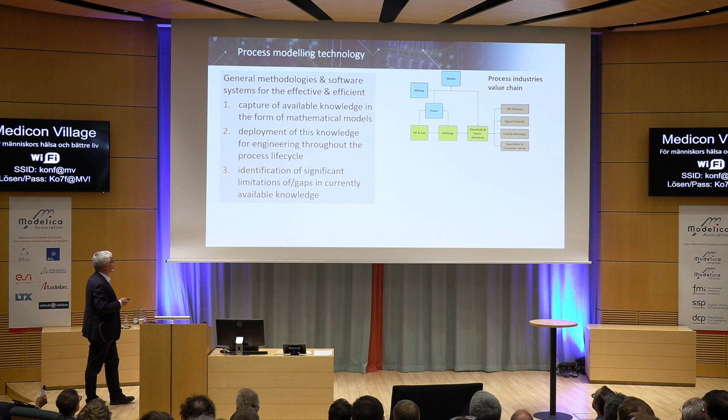So first of all, this talk is not so much about process modeling, it's about process modeling technology. And this is our definition of process modeling technology. It's general methodologies and systems for the efficient and effective, first of all, capturing the available knowledge in the form of mathematical models. So process modeling technology does not create new science, it captures what is there already.

Deploying this knowledge for engineering across the process life cycle, and then identifying what the gaps in the currently available science are. So process modeling doesn't create new science, but it helps guide science with an engineering objective.

We are talking about a different set of industrial sectors, as shown at the top right there, starting with upstream oil and gas, getting the oil and gas out of the ground, refining the oil and the gas, then the main chemical and petrochemical industry, and then we go into all sorts of things, including pharmaceuticals, agrochemicals, food and beverage, specialties, and so on.

Power in various forms is part of these process industries in the sense, for example, of not only power generation, conventional power generation, but the nuclear industry; nuclear fuel reprocessing is one of the main applications of this technology. And then, of course, this links up with mining, metals, and so on.

So a different set of industries to what we've been hearing this morning, mechanical, electrical, aeronautics, but nevertheless, of course, a very challenging environment. For starters, we don't know what a linear system is in process. We never, ever look at linear systems, not even as approximation, because all the processes are non-linear for various very well understood physical reasons. Okay.

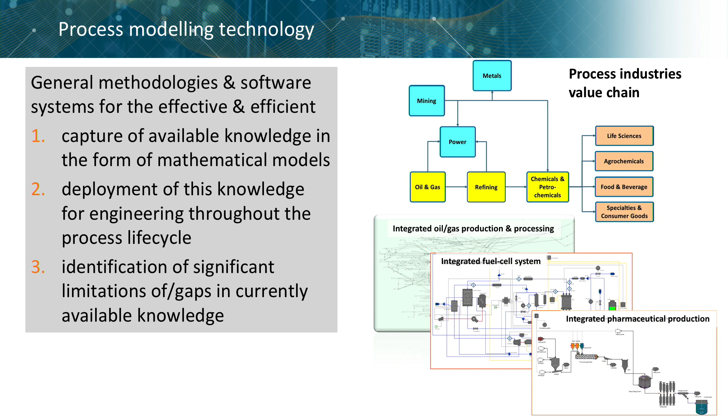Okay, so in terms of an outline for this presentation, it's two parts: where are we now, and where are we going to next? Nobody who's been in this industry for very long would venture to go beyond a decade forward in predictions. So I'm going to focus myself on what's going to happen in the next decade in terms of predictions, and then we have some conclusions.

For those of you who want to switch off at this point, my conclusions are very similar to what you heard from Karl Johan Åström. So, we did not communicate before, yes, and I didn't change my slides during lunch.

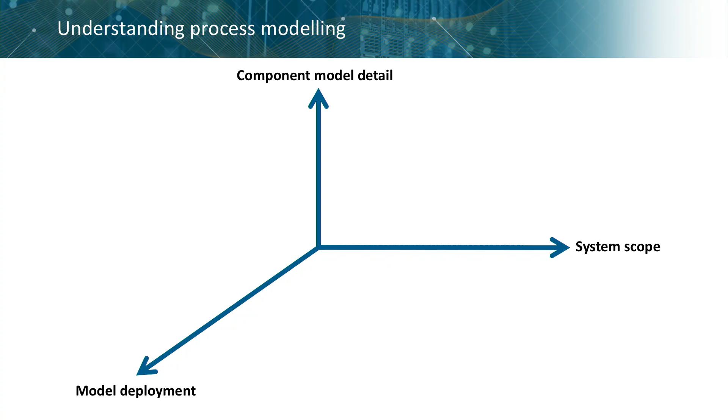Okay, so where are we now? If you try to understand process modeling, a very good starting point is along these three axes. The first axis is what part of the universe are we trying to model? And this could be anything in the case of process, from a single catalyst particle to a tube in a reactor packed with catalyst, to a reactor unit which may have 30,000 such tubes, to a plant which may have this reactor unit together with many other things, or many copies of this as well, to multiple plants linked together.

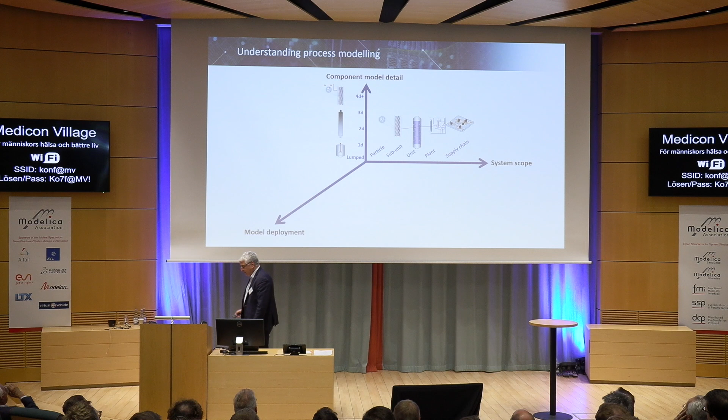So the first question I always ask, whenever someone talks to me about a process modeling tool or a process model, is this question: what is it focusing on? What part of the system? The second question you have to ask yourself is, what degree of physical detail are we putting in? There's different dimensions in this, but here I chose to look at the spatial dimensionality.

So we can have lumped systems, which are just, of course, ODEs or DAEs, to one-dimensional, two-dimensional, three-dimensional, four-dimensional. I'll show you a four-dimensional system in a second. They're fairly routine these days.

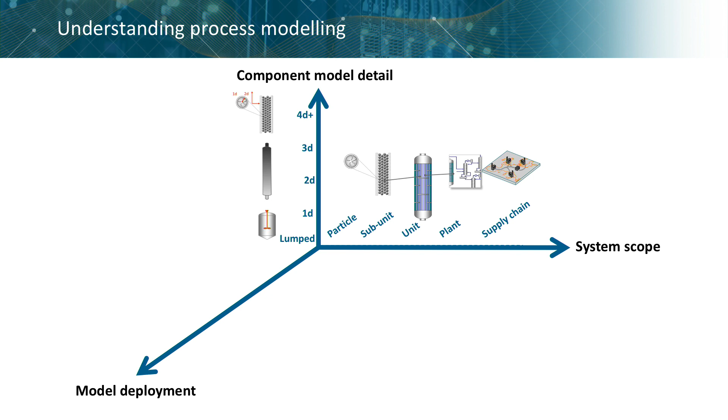And then the third dimension is, what do we actually do with this model? And there we have to follow the model along the process life cycle, from the early stage R&D, when we try to understand the chemistry on a catalyst particle, all the way to real-time operations.

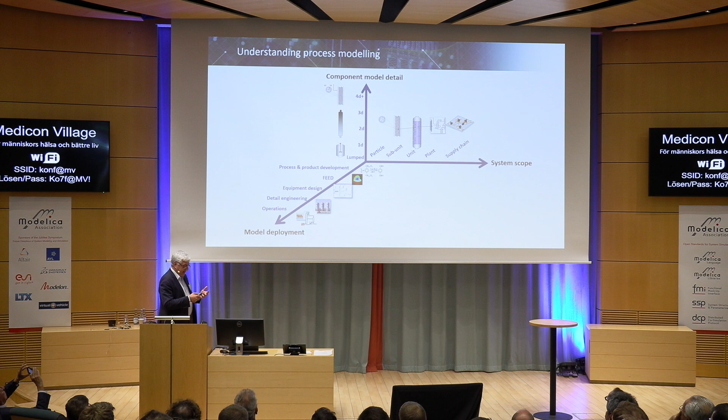Okay. So what's been happening out there? What are the key drivers right now along these three dimensions? And the first driver has to do with component model detail. I mean, essentially, building models of the kind that I'll be talking about is a very long, arduous, and expensive business.

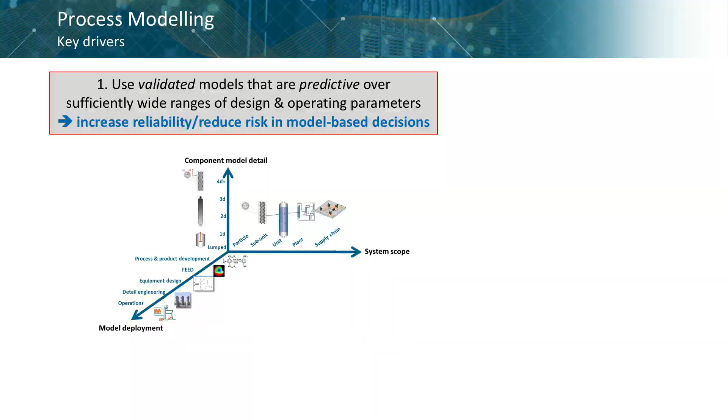So the minimum requirement is that you want models which are predictive, okay, they predict the impact of external inputs and disturbances on the key performance indicators within the accuracy required by the business objectives. Okay. In very practical terms, what this means is we are looking for more and more detailed physical models. Okay? So let me illustrate this.

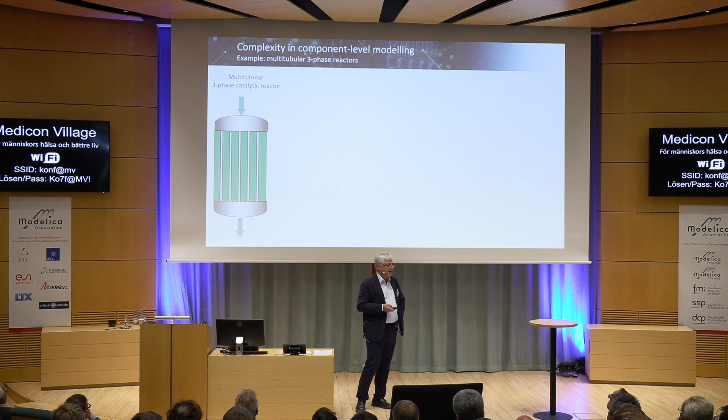This is a multitubular three-phase catalytic reactor. It sounds so strange. In fact, most of the exothermic reactions in the chemical industry are performed in systems like this. You have the tubes packed with catalyst, okay? And the reaction produces a lot of heat, and then you have to get the heat out from there, okay? So this is the model of the tube. It's one of those. There are 30,000 of those, or 10,000, or 40,000, something like this, okay?

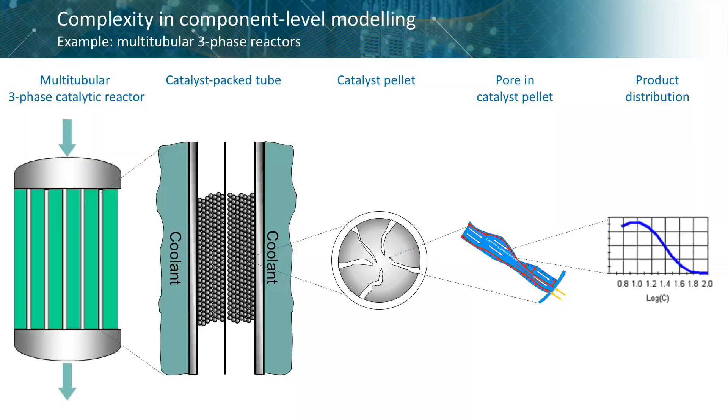The tube is surrounded by coolant fluid like this, and then inside the tube, I have catalyst pellets. This is not drawn to scale, by the way, the catalyst pellets are millimeters and so on. But anyway, if I take one of those, this is a catalyst pellet. It is surrounded by a film of liquid or gas in the system. Here's the catalyst pore. The raw materials have to permeate through this film here, then they have to diffuse through the pores, at which point they find the active catalytic sites, there is a reaction, and then the products make their way out, okay?

Now, this is a standard technology, for example, for Fischer-Tropsch synthesis. The product itself is actually a distribution of molecular weights, carbon lengths. So what do I have here? One dimension is axial variation. Second dimension is radial variation. Third dimension is intraparticle variation. And fourth dimension is the distribution with respect to the molecular weight. This is a four-dimensional model.

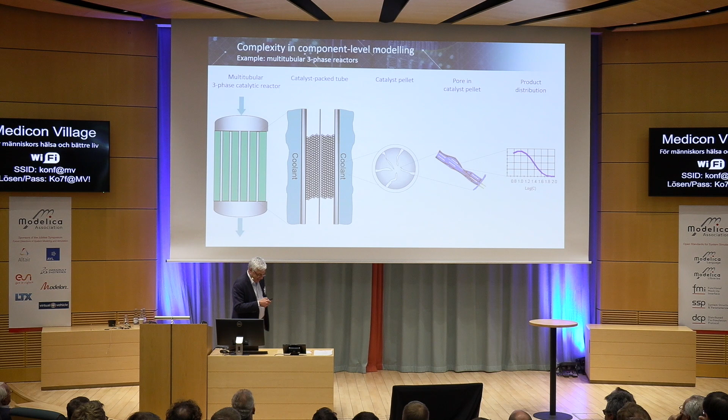Now, if you really want to predict how a Fischer-Tropsch reactor behaves, this is the degree of detail you have to go to. How do we know? Because we tried the lower degrees of detail for several years, and we didn't get very far. So this is not theory. This is the kind of models, for example, that companies like Shell are using in their Qatar gas-to-liquids plant to actually predict the behavior.

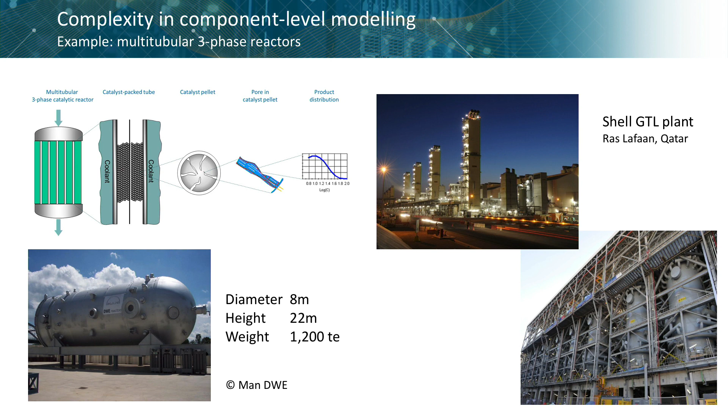So what happens on the scale of this monster here, which is 8 meters diameter, 22 meters tall, 1,200 tons, is actually determined by the physical phenomena on this scale, right? We have the models nowadays for doing this. However, you can imagine the computational complexity of a model like this. It's a four-dimensional integral partial differential algebraic equation. Okay. So at least we know that the components predict what they should predict.

Now, the second pressure we are under is to expand the boundaries of the system to the right. The reason for that is, many people understand that it's not really very meaningful to try and optimize a single unit on its own. Optimizing a single unit on its own may come up with a solution which is optimal for this unit, but from the point of view of the overall system, is suboptimal. This is not a point I want to elaborate too much in an audience like this. But to cut a very long story short, we are being pushed towards the right of this picture, looking at bigger and bigger envelopes.

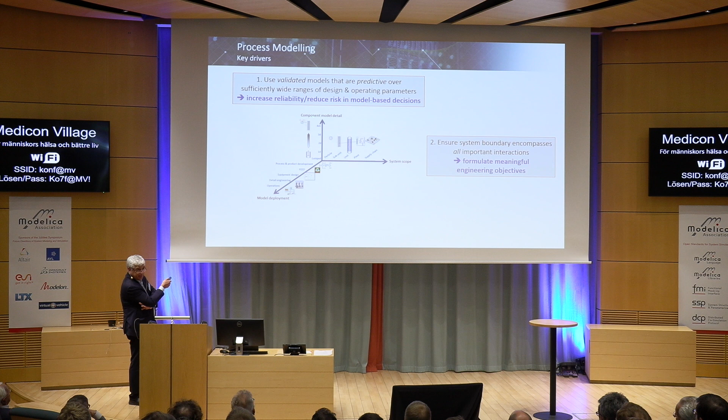Now, the problem we have is that we are simultaneously looking at bigger and bigger envelopes and more detailed models. Is this right? I mean, this is just something I've made up to impress you. So here's a case study that was published by Shell a few years ago. What they are looking at is optimization of the gas production and processing in southern Iraq.

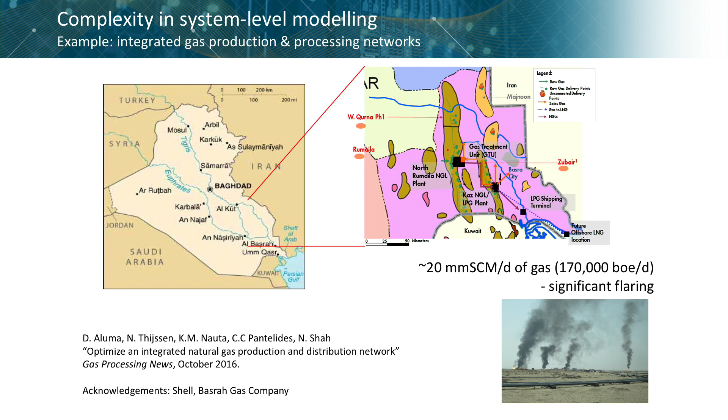Okay? So what they are looking to do is to study a system like this, where we have a number of oil fields producing associated gas. We have a number of processing facilities. They are all connected by these lines here, which are actually pipelines tens of kilometers long. And what we try to do is to optimize this system on a daily basis.

Now, of course, companies like Shell and the oil companies in general have been solving models like this forever, since the 60s, in fact. But the way it has normally been done is by using simple linear models for the individual components. What they're saying is the problem with that is you solve the model very easily. It's linear. It's just an LP. You get the optimal answer. When you try to implement the optimal answer, you may find that it's unrealizable.

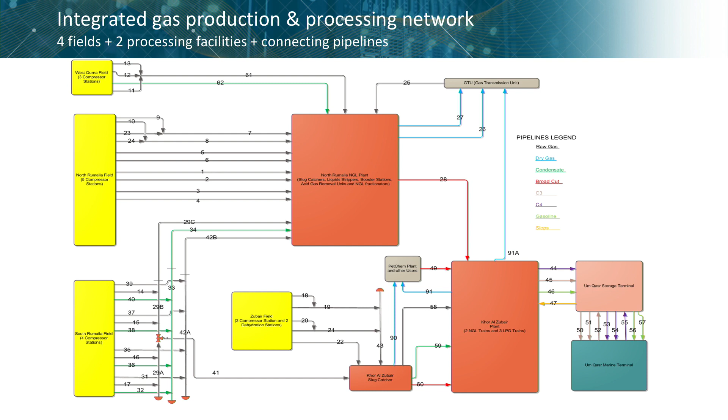It cannot be implemented in practice. So what we're looking for is to put in these models here a degree of detail which, until recently, we would only be able to put in a single plant.

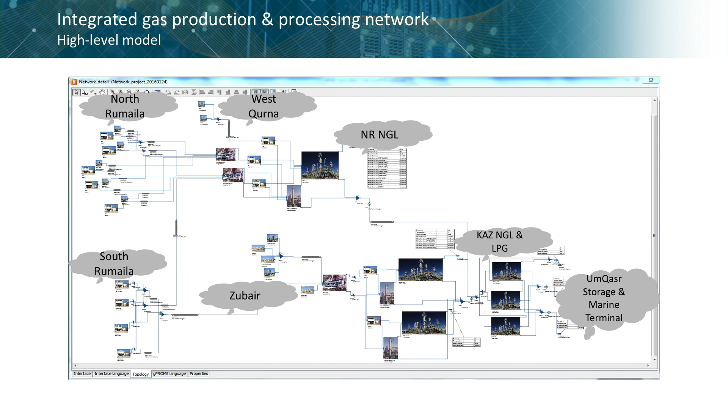So what you see here is the same model, but now inside the modeling environment. This is a gPROMS ProcessBuilder. And each one of those blobs is a compressor station, and they are the pipelines. These little things are tens of kilometers long, and these are the various plants, and we are looking at the whole system as a whole.

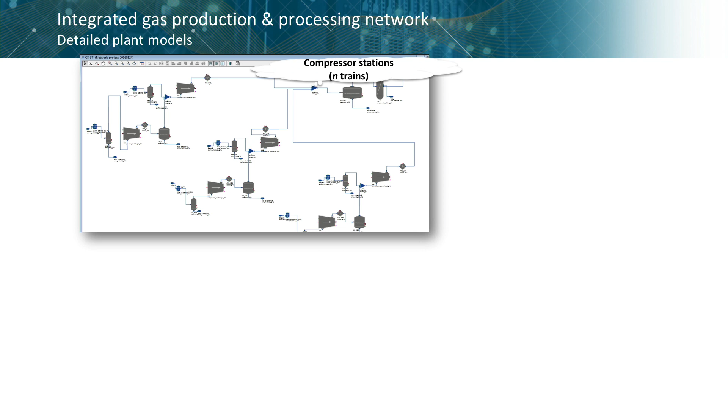And it's not just a picture, because if I zoom in into the individual bits and pieces, we have a higher degree of detail in there, okay, resolution, and so on. So as I said, this system is being optimized as a single entity, right? We are all into maths here.

It's a static optimization, I should say, 300,000 equations, okay, non-linear equations. We're doing optimization every few hours, 77 decision variables, 32 important constraints. Okay, so a lot of complexity. Is it worth it? How does the answer compare between this and some kind of nominal answer that we would use in the past?

Okay, it's very unusual to find published figures for this, but we are looking at 4.9% profitability. Now, in this particular case, it wasn't disclosed what the actual number is, but it takes a simple calculator from the basic knowledge of costs of things to work out this is more than $100 million per year. This is the kind of thing we're looking for. It is worth it if you can do it. So we're pushing the envelope.

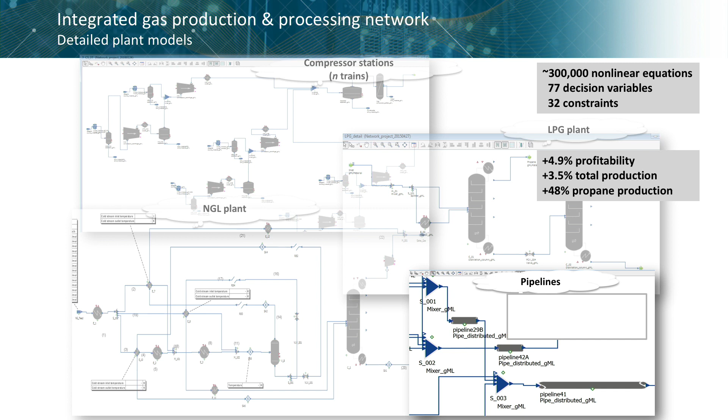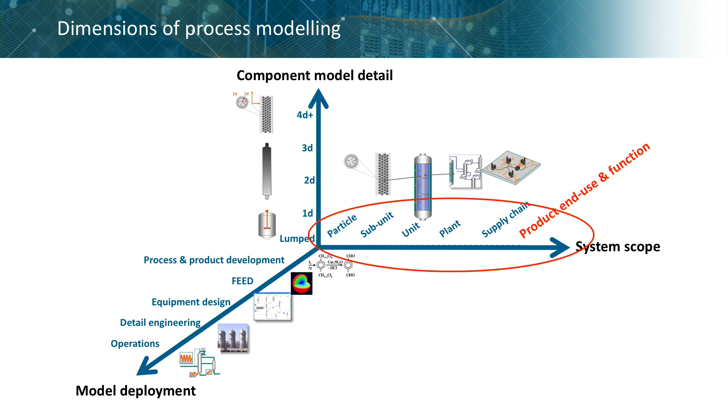So this is what's happening along here, but now we have a new dimension there. Because if you're producing simple materials like ethylene or nitric acid or ammonia, it all finishes when you produce the right material of the right quality at the right price. But if you're producing more complex things, like pharmaceuticals, the real test actually starts after the product leaves the manufacturing site. It's when you swallow the pill.

So it goes into the stomach, it disintegrates within 15 minutes approximately, you get the crystals of the active ingredient, and then those crystals go into the gastrointestinal tract, and they slowly dissolve and diffuse through the walls of the intestine into the blood circulation. So we cannot optimize the manufacturing process without actually looking at what effects our manufacturing decisions have on the in vivo performance of the drug.

So the current boundary of process modeling is like this, okay, where we model the various manufacturing steps. This is a gross approximation. In reality, there are many, many more steps in between. But then the important thing is we actually model the oral absorption inside the intestine. The biology of that, okay, is pretty well known. We can actually have models which do this.

We have models nowadays which can tell you whether it's best to take a pill before or after lunch. We have models which tell you whether it's best to form large crystals or small crystals here for that thing, okay? Don't want to go into the details here. There are a lot of things which have to be done with complex material structure. That is not just a flow rate.

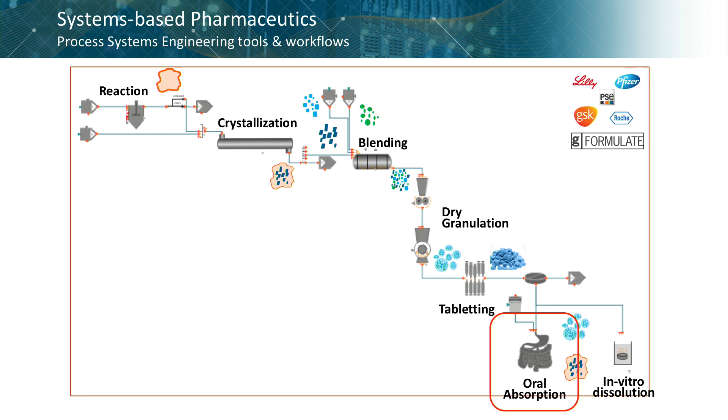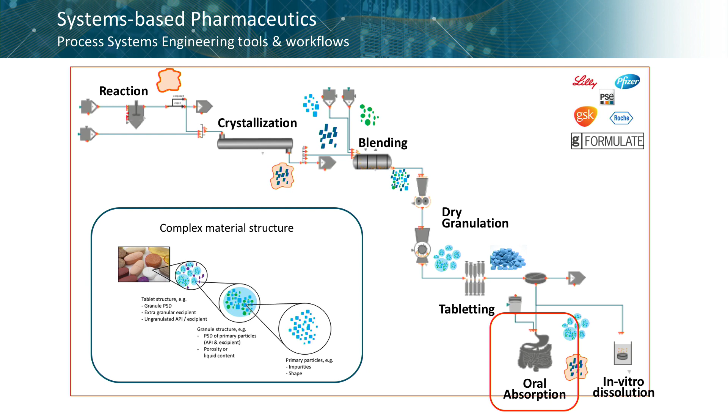Karl-Johan, you spoke about the information, going from bond graphs to having something which is more representative. Well, this is the next step up, where it's not just flow rates and compositions and so on. If you look down here, you have a distribution of tablets. Inside the tablets, you have a distribution of granules. Inside the granules, you have a distribution of particle sizes. And then inside the particle size, you have impurities. And the models we are looking for are of that level of complexity. So this is what we are up to in this case.

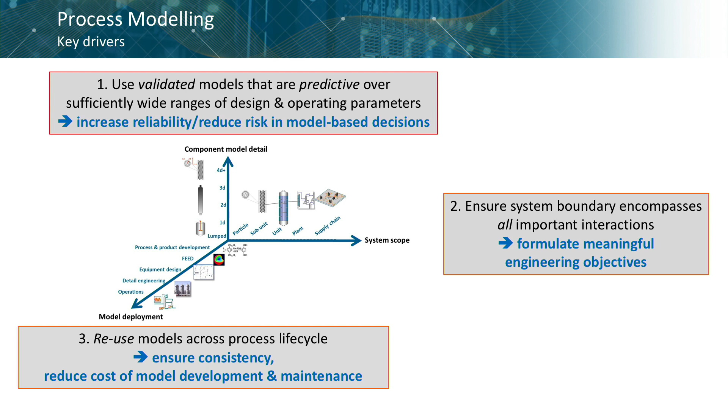And the third dimension I should mention is, so you've got the very detailed models over increasingly wider envelopes, and then what they're trying to do is reusability. The cost of developing a model of any of this kind is too high to be sustained by a single application. We cannot afford to build that detailed model of the reactor, use it for engineering design, then throw it away and do something else for operations.

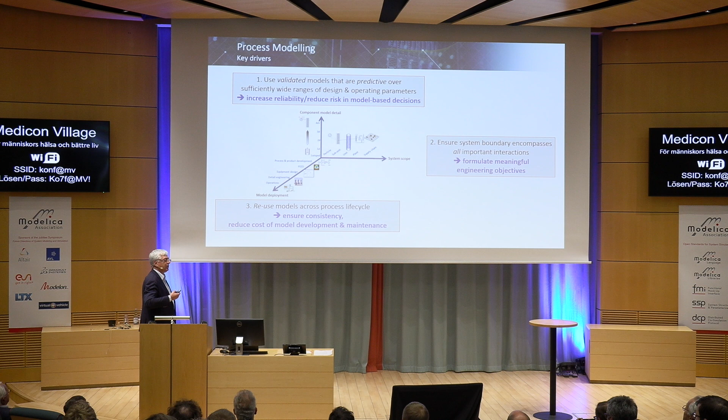So we want to reuse models across the process life cycle. So this is the process life cycle. It's a very standard diagram which starts from early stage R&D, engineering design, operations. One of the biggest advances in recent years is the extent to which we are increasingly able to take models, detailed models like the ones I mentioned before, and push them into the operations regime, okay?

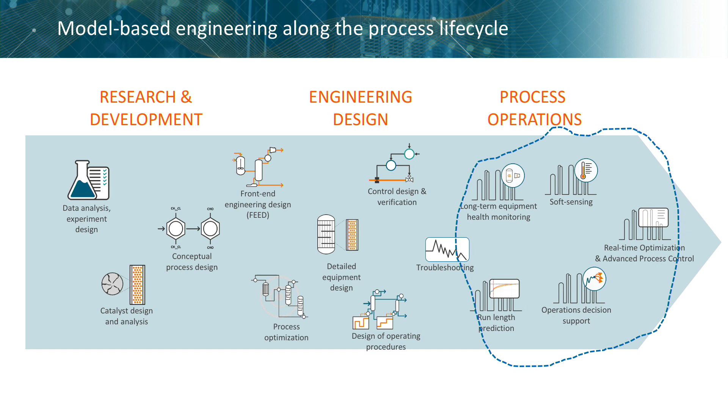So in operations, I mean things like monitoring the equipment, monitoring the activity of catalyst, soft sensing, of course, state estimation in this community is very obvious, all the way to things like nonlinear MPC. And if you take a classical hierarchy of control, we're now beginning to be able to take detailed physical models and use them not at level 1, which is a DCS. DCS is well established, there's nothing you can do there.

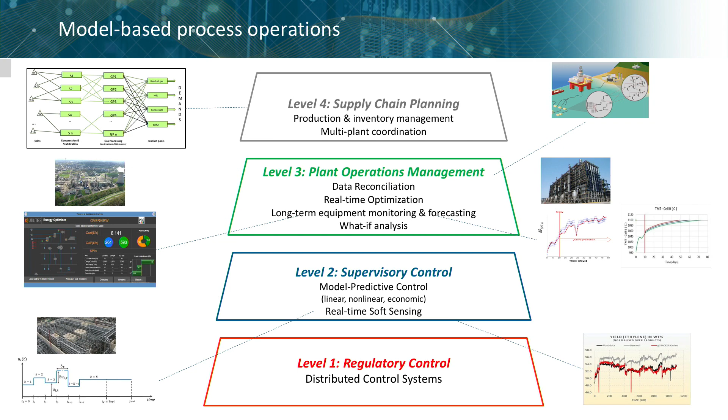But going up one level, for example, nonlinear MPC in polymerization plants, real-time soft sensing using very detailed models of olefin plants, real-time optimization, including discrete decisions in utility plants, monitoring of coking and catalyst activity in olefin plants again, and so on. So this is the kind of thing which is becoming routine.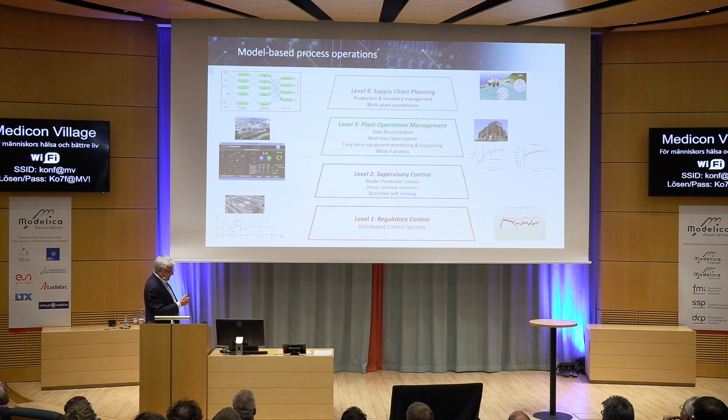I was very, very interested to see your point about taking models closer to the DCS, and we have a talk after this on this. So this is where the next frontier is, and we're beginning to get in there. The key point here is that we exploit the process knowledge, it's just marketing speak for scientific models, okay, to essentially improve the quality of the results, as obvious.

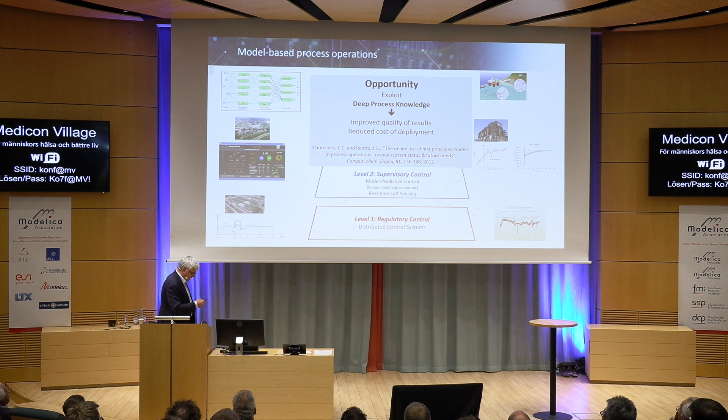But one thing which is not quite so obvious is that in some cases, the cost of deployment of a solution which is based on detailed physics is actually less than going to the plant and kicking the plant around for 3 months to build a response-based linear model. So I may come back to this at the end. So this is really where we are now, okay? And the question is, what is coming next?

And of course, the buzzword through our industry is Industry 4.0, digitalization, and so on, a lot of which is hype. Now, the question is, what isn't hype? Okay, and what isn't hype is the same as asking what is new. What are the things we can use in our kind of technology? Now, I mean the inclusive our, you know, Modelica, Dymola, gPROMS, that were not possible before, were not available before. So undeniably, we have advances in 3 different areas.

One is data. We have a lot more data. We are measuring a wider range of quantities like compositions. I know this is not very relevant to you, but composition is one of the biggest problems. The sensors are higher quality, but the most important thing from the point of view of software engineering, people like myself and many of you, is these data are accessible. I can write an app here, and with the right permissions, I can access that temperature on that plant in the Middle East right now. And that is very important from the point of view of developing sophisticated applications.

The second area there is computation. Of course, we have much more powerful computers at lower cost, and so on. We have high-performance computing nowadays. Even on a machine like this, I have 4 cores, and that's nothing. We also have more flexibility. And the cloud, again, is another one of those much hyped concepts. But from a very practical point of view, one thing that the cloud does is I can take my credit card out, I can go to Amazon Web Services, and I can secure 1,000 cores for the next 2 hours to do a big computation. And that really changes things, as you will see with some of the things I'm going to show you.

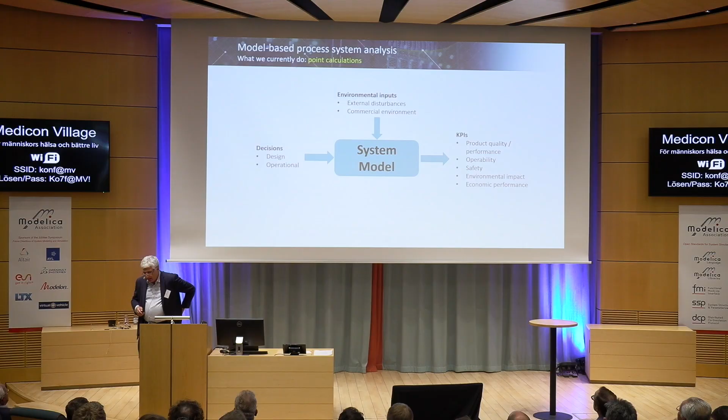Now, one of the things we want to do is answer some of the questions which were raised in the previous presentations. And some of them did have to do with what we could call understanding global system behavior. If you look at the way we use modeling nowadays, what we have is a system like this, a system model. We have various inputs, and the only inputs we really care about are things which are at our disposal, decisions, and things which are not at our disposal, like external disturbances, commercial environment, like prices, market availability and so on.

And then a model is simply something which is a mathematical function which relates this and this to the key performance indicators of the process, the product quality, performance, the operability and safety of the process, environmental impact, and so on. If you look at the way we use modeling nowadays, what we do is point calculations. We pick certain points here, and then we solve the model, we map them onto the KPIs. This is really how most modeling is being used nowadays.

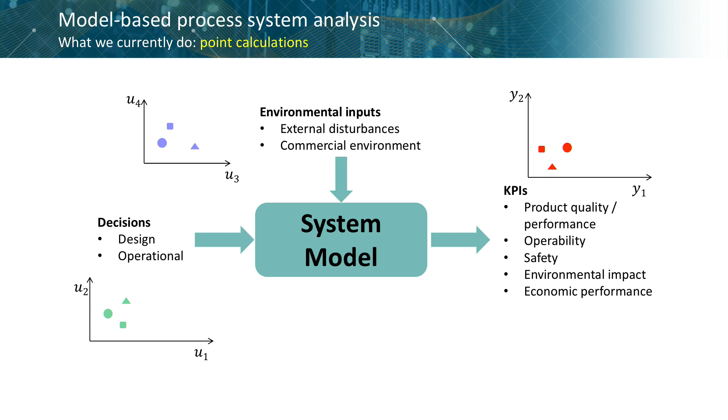Now, this is a huge waste of opportunity for something which cost 6 months to develop and $500,000. What we really want is to move to a different kind of paradigm, where we're interested in the behavior of the system, not at certain point decisions, but over the entire decision space. We recognize that the external inputs, the environmental inputs, are probabilistic. And then, of course, if we do this, the answer we're going to get isn't going to be a point, it's going to be a probability distribution.

So what we are looking for is probability distributions which quantify the extent of risk you're taking in basing any decision on these calculations. We also have tools like global sensitivity indices which say which part of this variability is due to this or to this. Of course, once you have models, the thing you have to recognize is that there is a third source of uncertainty. And that is, of course, the fact that the model itself is uncertain. And of course, we are all used to having parametric uncertainty being described by covariance matrices and so on.

I don't want to go into the details here of how we do this, but establishing these kind of variability measures is one of the key challenges for process modeling nowadays. It's very easy for us nowadays, because we have the algorithms, we have the library models and so on, it's very easy for anybody to put together a model of pretty much anything. Too easy. The real question is, do I believe the answers? So being able to quantify this is a key part of the equation. I don't have time to go into how we do this, but a lot of this relies on fairly advanced techniques for parameter estimation, like frequentist techniques like maximum likelihood, or designing experiments, and so on.

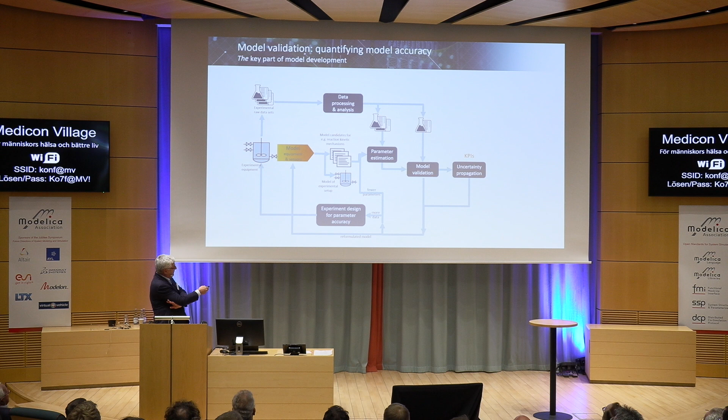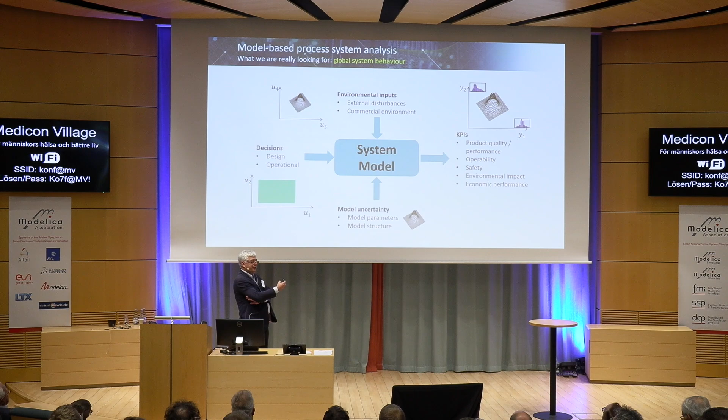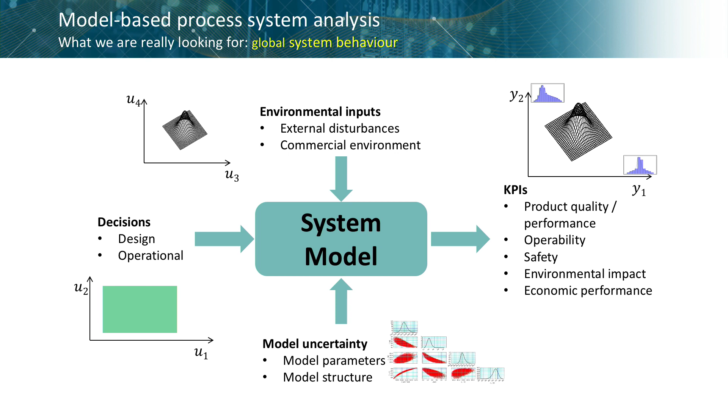Now, increasingly, if I go back to this, increasingly we are moving to a different paradigm. We are relying more and more on Bayesian estimation approaches. I suppose that most of you will be aware of the fact that this is a gross approximation of the uncertainty in these parameters. There are techniques, things like Markov chain Monte Carlo, nested sampling, and so on, algorithms which actually quantify the true uncertainty or probability distribution of the parameters. And they don't look like this. This is what they look like. They are not regular multidimensional normal distributions. We can compute this at enormous computation.

And this is where the new technology comes in. The fact that we have high-performance computing, which allows us to do intelligent sampling of the input space. It allows us to compute this kind of thing here. We have techniques like data analytics, data mining, which allow us to analyze the inputs that go into this calculation. It's not a question of putting it into a calculation, it's analyzing the inputs.

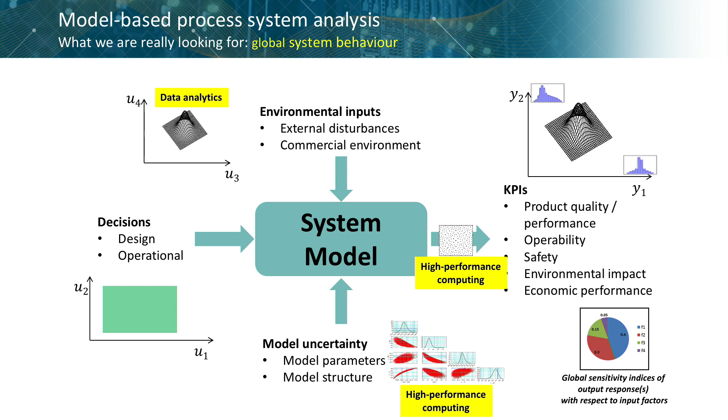So this is translated into practical tools, and we can look at variation of uncertainty over time. I don't want to dwell too much on this, but we're beginning to have practical tools which do this. They rely on this massive increase in computing power. So having more computing power isn't about doing the sort of things we used to do before, and it took 5 minutes and now it takes 2 seconds. It's about doing things which were not possible before.

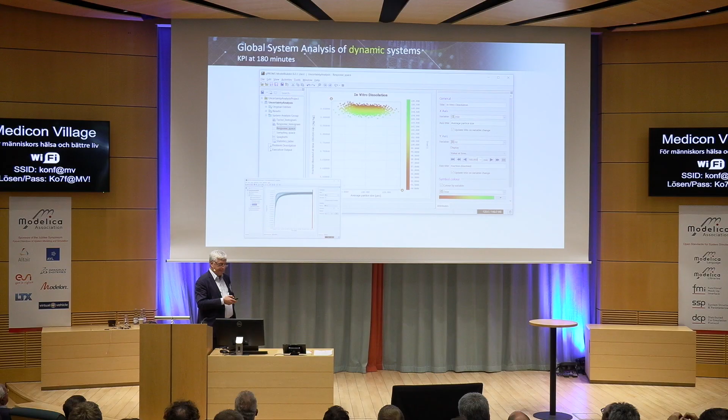The other area, which I'd like to touch briefly upon, is the impact of advances in data science. Already we had a discussion here about data-driven approaches and so on. And of course, the story of data-driven modeling is a very tempting one. It's such a simple story. We have a plant. We have all these sensors now. I mentioned we have much better sensors, much more of them.

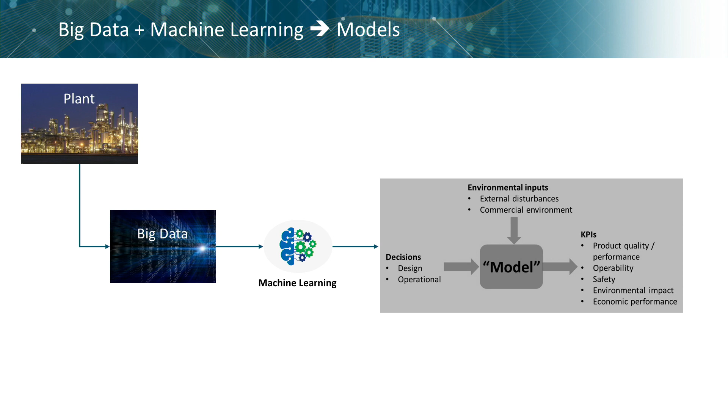We collect this big data. We do machine learning, and we get a model. This model, to be honest, is just a mathematical mapping between inputs and outputs. Nobody says that it has to be physics-based. So everything we do, simulation, optimization, global system analysis, and so on, is still valid. So what's not to like?

And more to the point, anybody can very easily do this. Okay? We've got the data. We've got standard algorithms in Python, scikit, MATLAB, and so on. We can just do the analysis. We get the model very quickly.

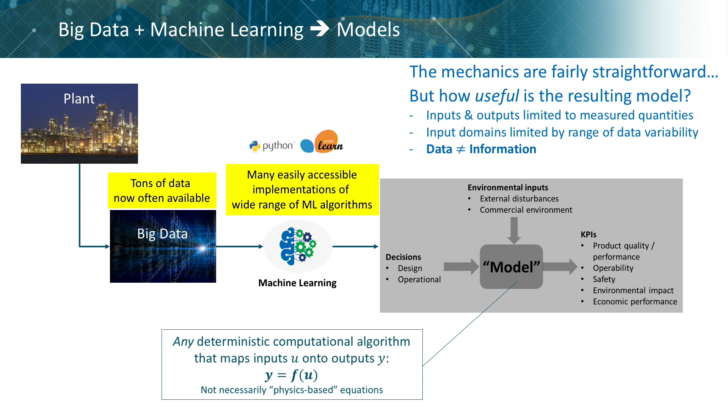Okay. Of course, as many of you suspect and know already, this story isn't 100% accurate. It's not a question of whether I can get a model. Of course I can get a model. The question is, how useful is this model? And really the question is the fact that, first of all, the inputs and outputs, the U's and the Y's in this model, by definition, are what I can measure. But very often, the KPIs I'm interested in are quantities that I cannot measure. So that is a bit limiting.

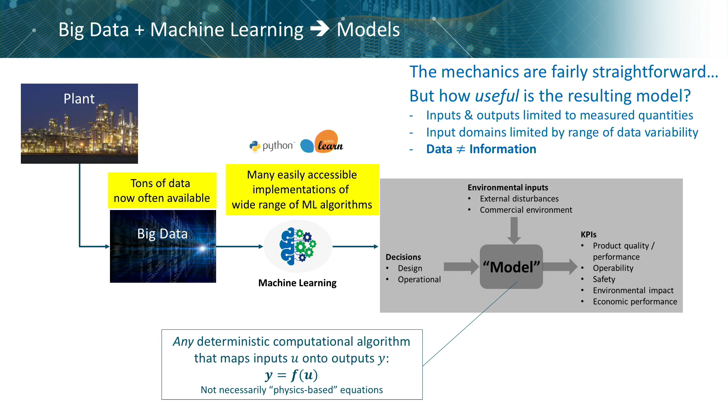The second thing, of course, is, again, most of you will know, is that I can only use this model within the range of variability of the inputs that is represented in the data. Basically, it's very dangerous to extrapolate this model. So those two are pretty obvious points.

The third point is not quite so obvious, that having a lot of data is not the same as having a lot of information, especially in continuous processes, where the main objective of the plant manager is to keep the plant steady at the same operating point day in, day out. You may have gigabytes of data which contain extremely limited information. There are statements I can quote you from real presentations of real companies who have found this the hard way. So we do not think that this is the way to go.

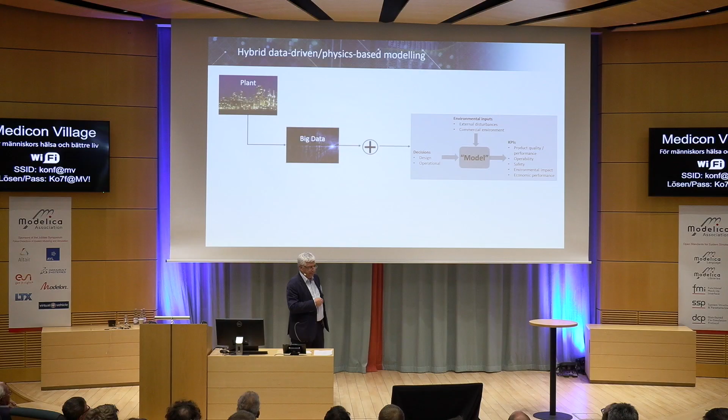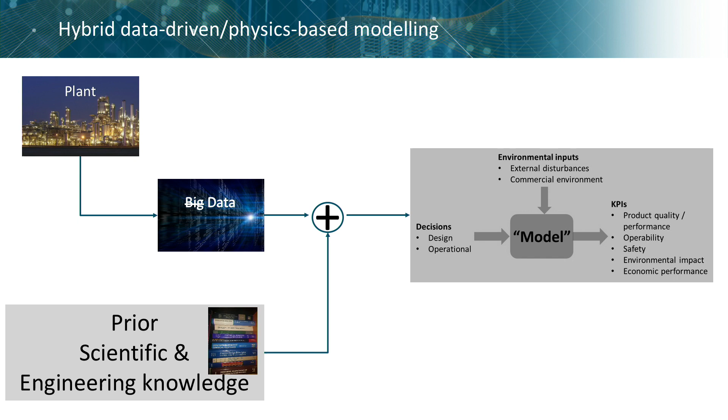The way that this makes sense is in the context of a hybrid data-driven physics-based modeling, where we use prior scientific and engineering knowledge, i.e. the kinds of models we have already, okay? Our philosophy has always been push the physics as far as it will go, then use a data-driven element to patch the gap between the best physical model and the reality. There are different approaches, which is start with a data-driven model and introduce the minimal amount of physics to make the model realistic, like mass balance and so on. It's just philosophy, but my philosophy is always go maximum physics and then patch it with data.

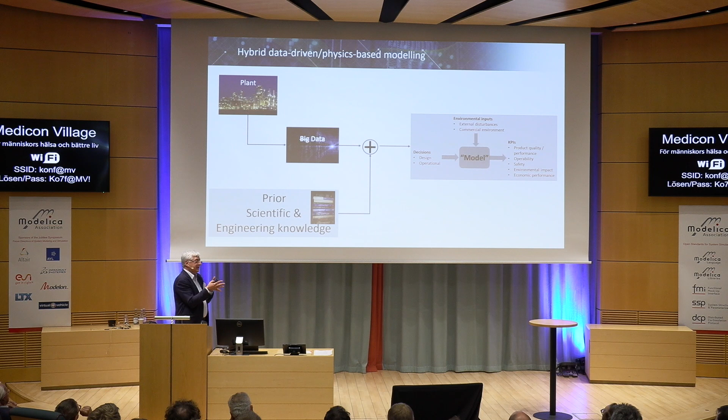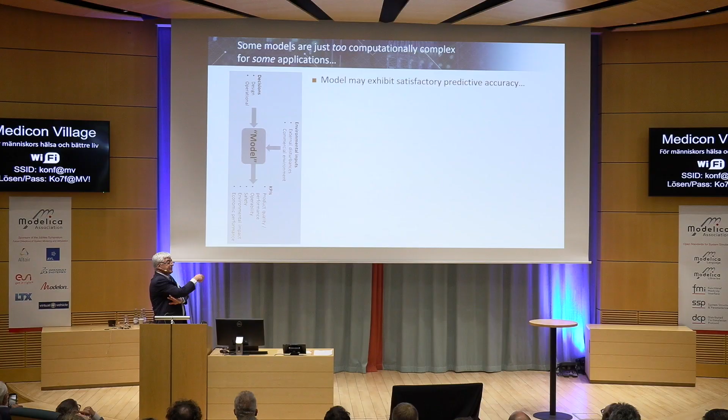Okay. So one way or another, either by physics alone or by physics and a data-driven element, we have models nowadays which are really predictive. And that is actually true for most of the industrial sectors I mentioned before. So what is the problem then? Are we done? The problem is that the model may be predictive. It may cover the right scope in terms of the part of the universe that it models and so on, but it may be unsuitable for some of the applications we have in mind.

I mentioned before about the idea of taking some of these models into real-time service, online operation. Obviously, that implies a certain degree of both responsiveness but also robustness. You don't want applications failing in the middle of the night in the middle of the desert. Okay?

Also, in some cases now, although we have made so many advances in terms of computation and so on, our ambitions grow faster than our capabilities. So, for example, nowadays, a lot of the countries in the Middle East have begun to take a very global view of the entire country, basically, and they want to do country-wide optimization in a single go. Just like the example I mentioned in the beginning, but probably an order of magnitude bigger. And in this case, what we need is model reduction. That's the term you used.

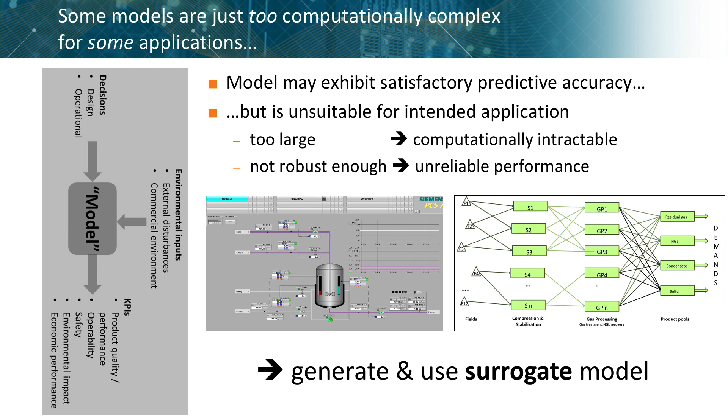And here, one approach you'd use is by trying to generate surrogate models, take advantage of the technology that we have already. So a surrogate model is just an explicit relation between inputs and outputs, explicit algebraic relation, at least for static models. For dynamic models, it could be slightly different.

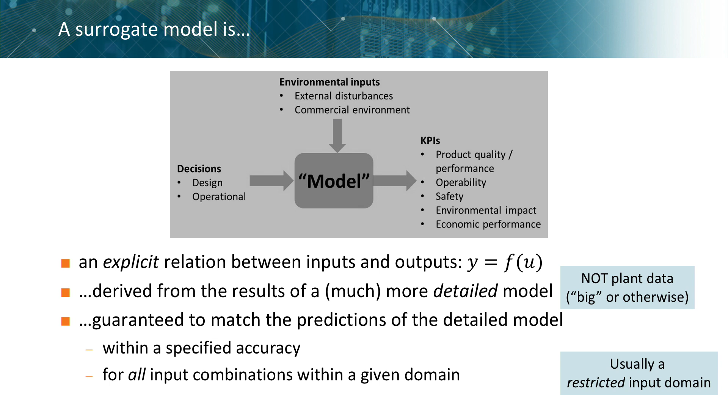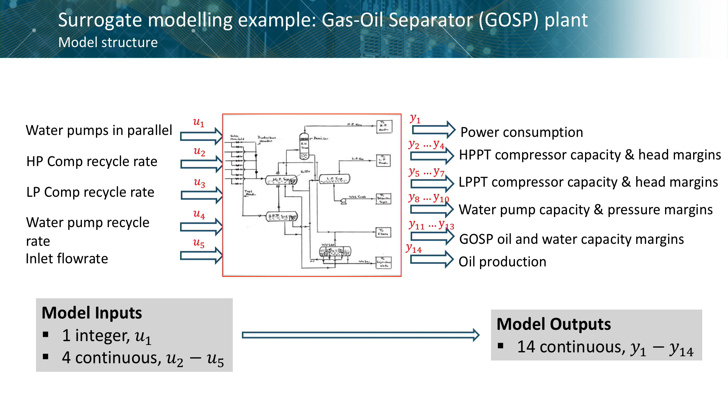The example I have here is a real example, disguised and so on. It's something called a GOSP, gas oil separator. It's something which we can easily model from first principles. The problem is not that we cannot model it. The problem is we have systems which have 100 of these plus many other things. So if we put the whole thing together, it becomes completely intractable. So what we have in a typical unit like this is 5 inputs, one of which is a discrete value. It takes values 1, 2, 3, and 4, and 14 outputs, which are continuous.

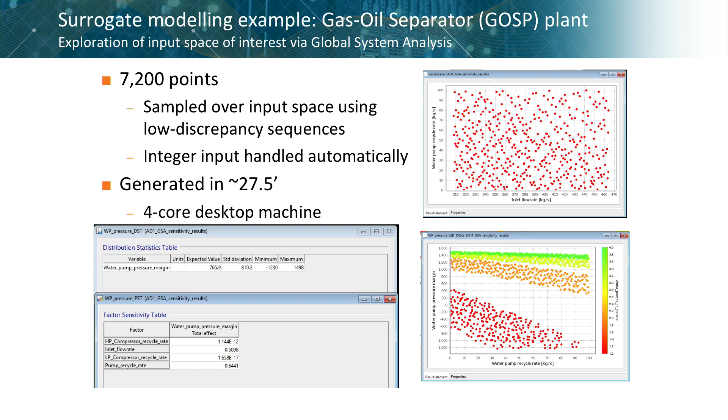And we have technology nowadays which, first of all, creates a lot of data by sampling the detailed model, using the techniques I mentioned before, global system analysis, and then automatically derives a model with a guaranteed accuracy over a certain domain space. Here, the algorithm I'm showing is by Nick Sahinidis of Carnegie Mellon University. There are many other algorithms for surrogate modeling, but this is the one we have most experience with, I should say.

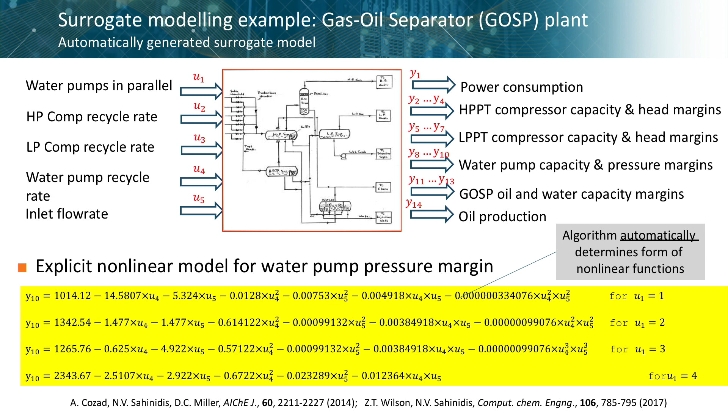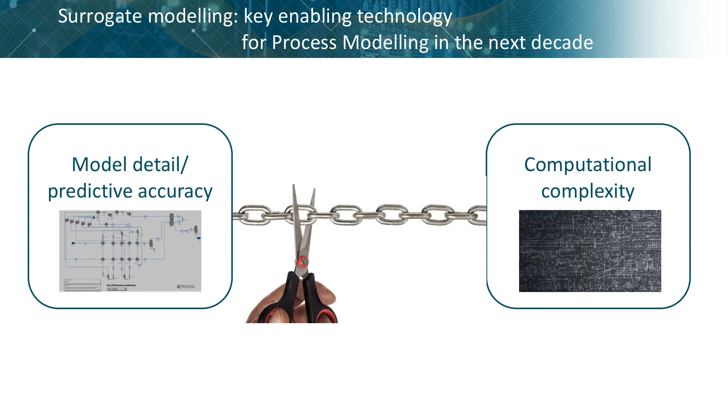The algebraic form and the basis functions are determined automatically, and we have models now which we can take. So we can throw the detailed model away here and use these explicit expressions, and that makes a huge difference. This is core technology. It's not just an analysis algorithm. It's core technology for the way things are going, because the story I'm giving you is one in which we go for the maximum physics over the maximum scope.

Inevitably, that's going to result in models which could be computationally intractable. This thing allows us to break the link between computational tractability and predictive accuracy. So at least speaking for myself and my group, we are putting a lot of emphasis on this technology.

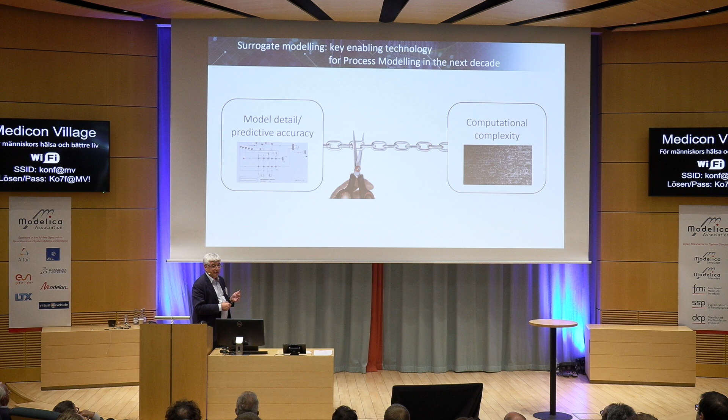So to conclude, we've come a long way, definitely. If you compare with where we were in the 90s, this was pushing it, I think, and we can do some extremely complex applications, some of which I showed you here. If I sit back and think, what is it that made the difference here? It's, in my opinion, the 3 things we mentioned there.

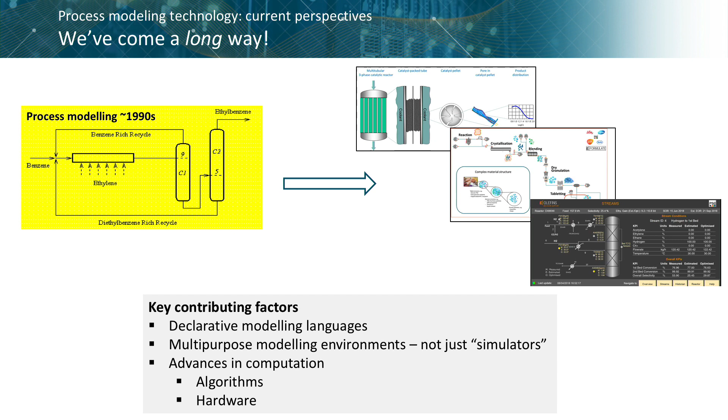Number 1 is declarative languages. Without declarative languages, like Modelica, like gPROMS and Speedup before it, it wouldn't have been possible to capture the state-of-the-art knowledge of these specific disciplines into models. If I had to write a specific Fortran or C++ module for each one of them, it would never have happened, full stop.

The second development is the fact that we realized that these are not simulators. What we have is a model, and then we can do many different things with the model. We can do simulation, of course, we can do optimization, we can estimate parameters, we can identify and isolate faults, we can do the kinds of things we've been hearing about.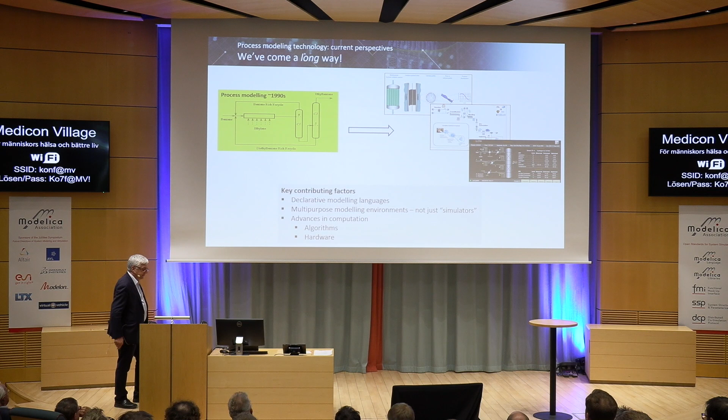And of course, the third one is that we did make some advances in the algorithms underneath, the numerical algorithms and symbolic manipulation algorithms. Even converging the steady-state simulation of something like this has taken a lot of advances, and of course, the hardware. So where do we go? This is my last slide. Where do we go in the future?

Well, I identified many different things for the future, ongoing developments, and so on. To my mind, the most exciting is this one here, the picture I showed before, which is about taking detailed predictive models into real-time applications. From nonlinear MPC, which we've known about for a long time, but who could ever get it to work before, to using massive detailed models to monitor the activity of a catalyst in a reactor.

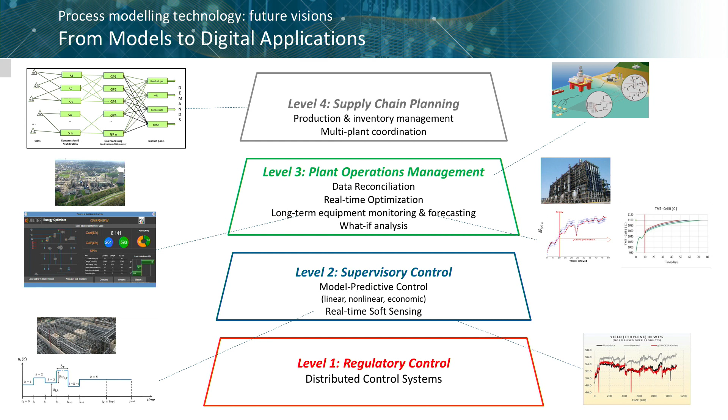So actually, to be honest, we're doing this already. So what's my problem? Give me any one of these challenges, a moderately sized model, not a 300,000 equation one, maybe a few thousand equations, and I can actually do this. So what's the challenge? The challenge is that each one of these applications is developed as a completely different code base. It's a completely bespoke development.

Now, these applications are not models anymore. It's not a single model doing a single optimization. Any one of these applications is a set of model-based applications communicating with each other in real time. Even for nonlinear MPC, the simplest one, I have an estimation calculation followed by a dynamic optimization calculation. Others have 2 or 3 applications coordinated in real time, and very crucially, talking with an uncertain outside world, getting data which may or may not be valid.

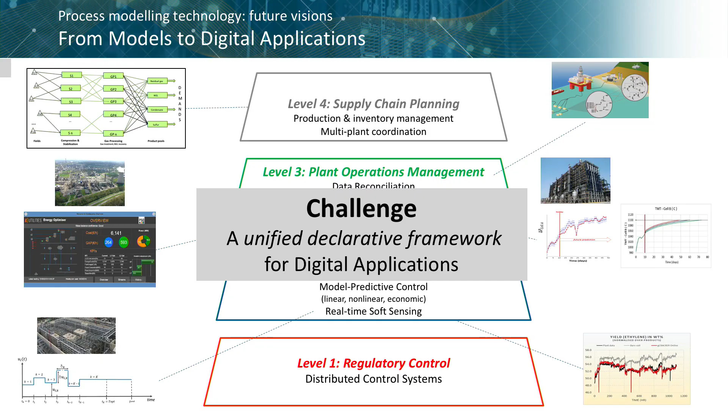Now, and this is really the challenge, just like we came up with unified frameworks for modeling 20 or 30 years ago, could we come up with unified frameworks for digital applications? Because if we could, we would massively accelerate the adoption of models in these real-time operations. That is a challenge we're working on, but I'm sure you will want to think about this for the future. And if we do this, the impact will be huge.